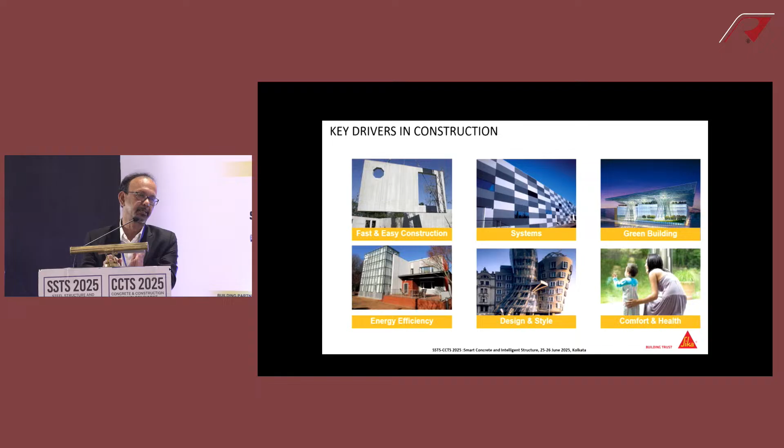Anyone heard of the Chungthang hydroelectric project in Sikkim? There was a tunnel lining to be done, and it was inaccessible for concrete truck mixers. What happened finally was that concrete could be pumped across 2 kilometers on a decline. Concrete to be pumped on a decline is more challenging than incline. And we have so many good examples across India. So I'll be talking about all of that.

And dispersant, so the topic is dispersant polymers. Now what is so important about dispersant polymers? It's very easy to have a polymer. We call them admixture.

And wherever you go today, contractors, ready mix companies, pardon me, always say, okay, are you L1? Total cost optimization is never seen. When you talk about total cost optimization, it's the speed at which you can pump concrete. It's the technology you use, whether you use it for precast. India now is going a big way in precast.

In fact, everything in the bullet train was almost precast. Almost 300 kilometers have been finished. Now the next 200 kilometers, 204 kilometers, will be built in Maharashtra.

Then we are talking about complexity of structures. If you look at structures like the Parliament Building, the new annex, all these are about the complexity of design, and why you can put your concrete without blowholes, fair finish concrete. I will show you some examples where high-rise buildings have gone up with just fair finish and no plastering. You can almost see your face on the wall, it's so shiny. And it is possible to do it if you just adopt certain technologies and certain practices.

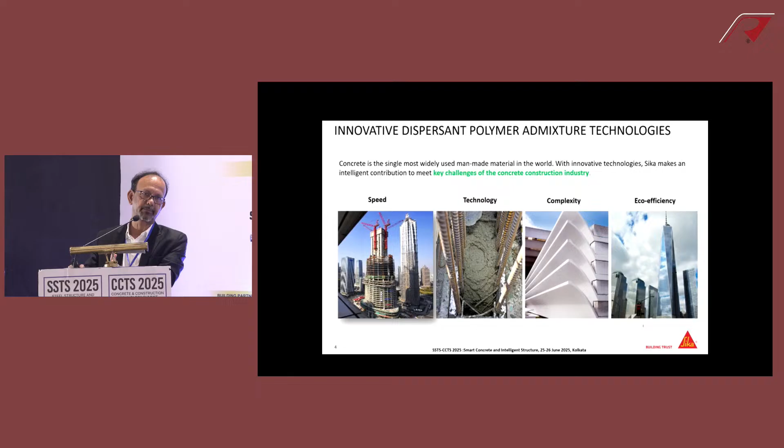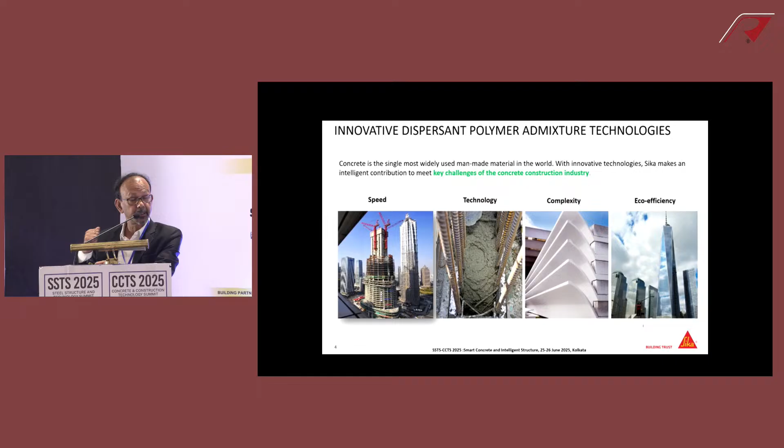Then eco-efficiency. Most developers in the market would love to have green rating. Big houses like ITC, for example, Nestle, whenever they do structures, they always love this green rating. Green rating is a function of concrete and other elements like lighting, LED, etc. It's also about how you do rainwater harvesting. Concrete is one of the most important elements, and we will explain a little bit about that.

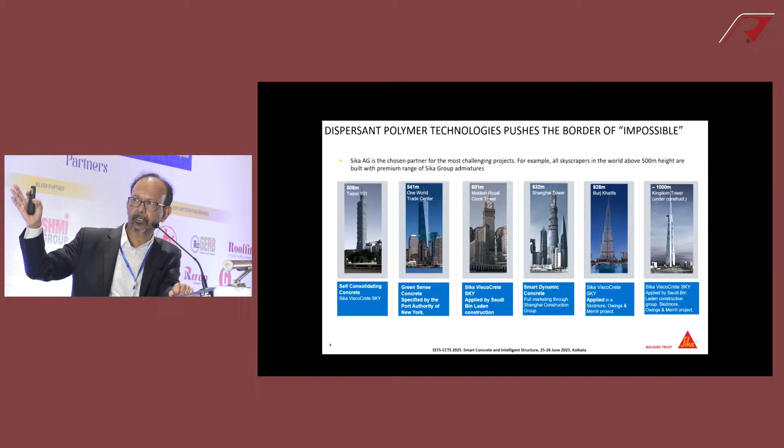This is just to give you an idea of how dispersant polymer technology, as you go from height to height, across from Taipei right up to Kingdom Tower, which is 1 kilometer tall.

It's not that there were special concrete technologies only from the Western world. Some of the projects I can tell you were also handled by people from our own country, in terms of the concrete technologists, quality control experts, etc.

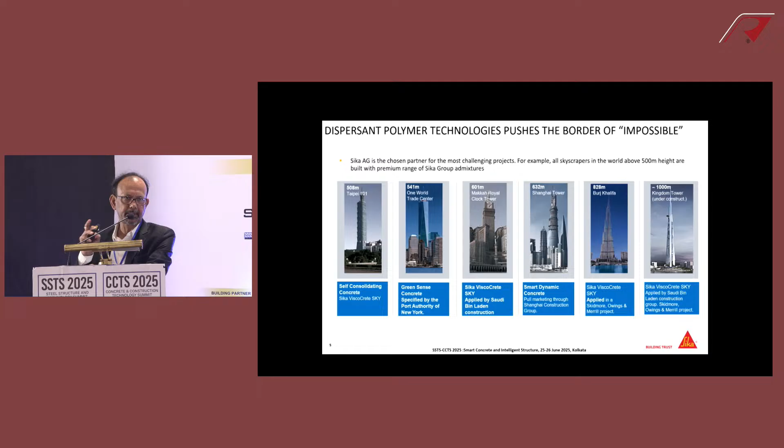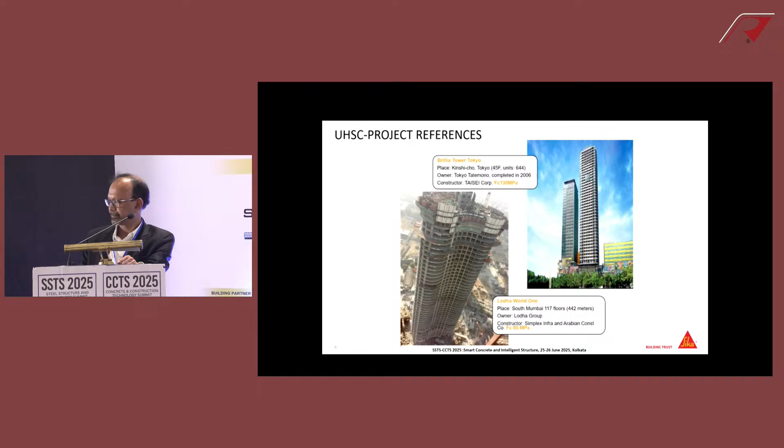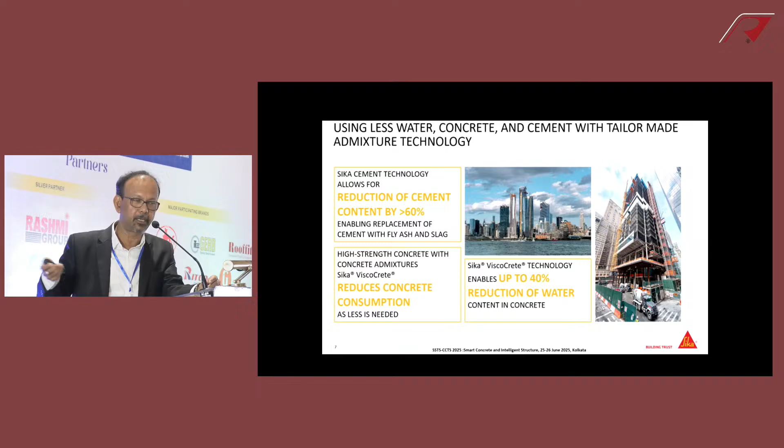So less water, concrete and cement with tailor-made admixture technology sums up what it is. It reduces concrete consumption because you have slender columns, especially in the example of ultra-high strength concrete for a bridge, where the section thickness of 150 mm came down by almost 50%.

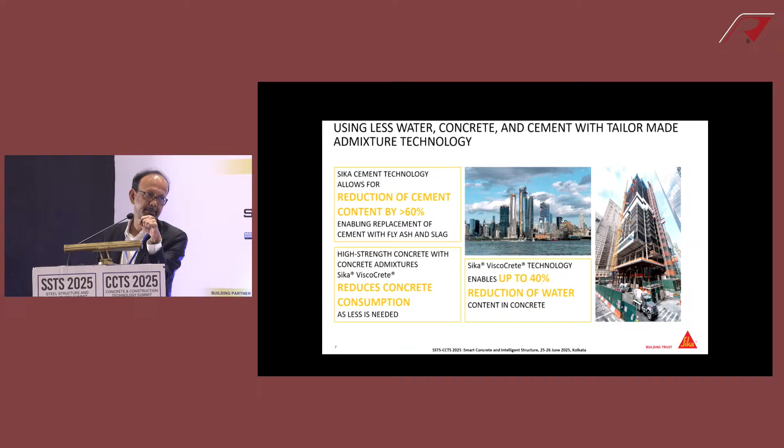So look at the weight transfer. You did not have too many piles resting, only the span even for the foundation was around 50 meters. So less concrete again, eco-efficiency.

So just to give you an example, everything comes packaged in the molecule, which is about the chain length, the side chain, electrical charges, etc. I think this is all known very well because admixtures are now almost 40 to 50 years old in the country.

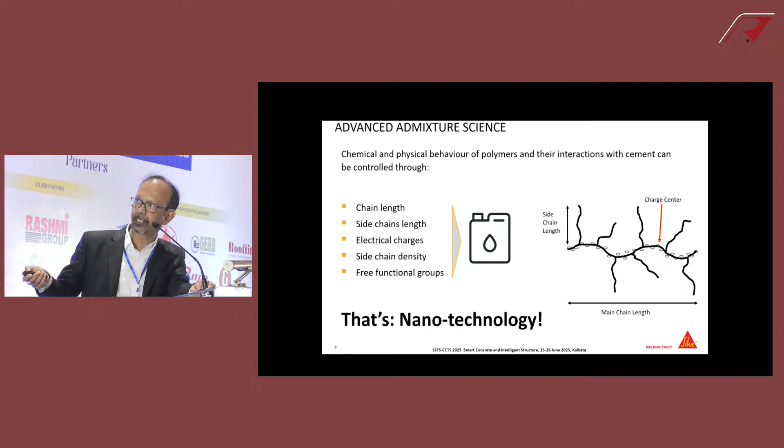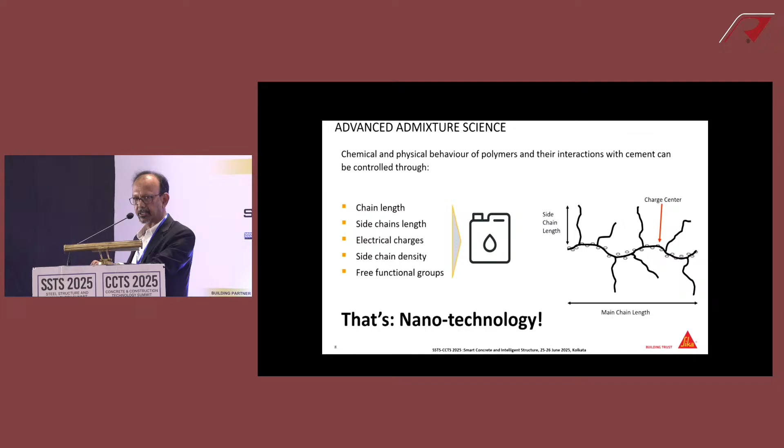This is where the molecule is like a fish bone. You have a central bone, and you have side bones. Depending upon the design the manufacturer does, with the charge centers and the spacing, this is what creates the dispersion effect.

But it's not only about dispersion. It's also about controlling the mix quality, the ease at which the concrete can be mixed, less vibration. You can have a concrete where you vibrate for 15 seconds and it spreads. Then another concrete needs only 5 seconds, it spreads easily, no blowholes. When you remove the formwork, you get fair face concrete. And then there is another concrete where you don't have to vibrate at all.

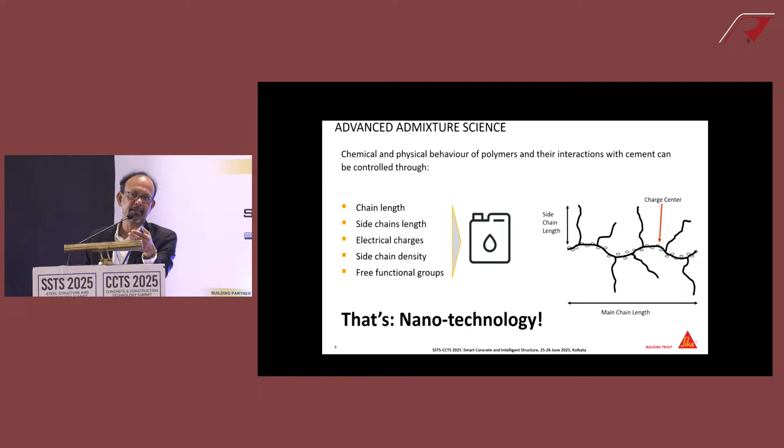Less labor, less energy. Vibration also requires energy, it requires fuel, it requires people to vibrate. So look at the optimization, because skilled labor in the civil engineering or construction industry, what it used to be 20, 25 or even 30 years back, you don't have it today. Construction experts are facing a big challenge on the ground.

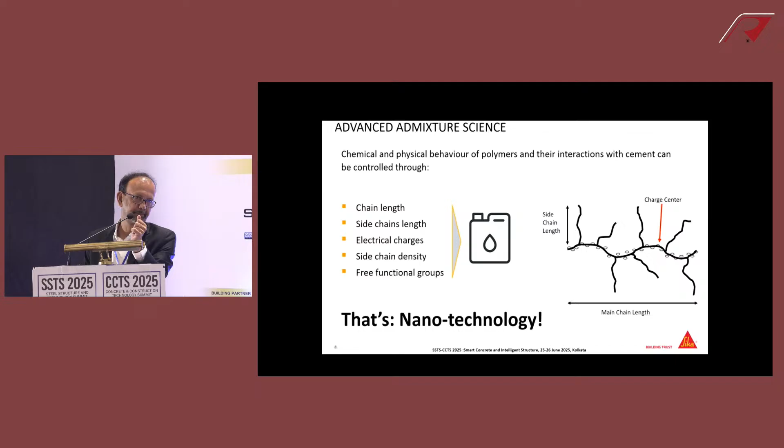So just to give you an idea of how the mechanism goes: the calcium ions of the cement, this is cement, and then you have this PCE technology. This is the long chain, and these are the innumerable side chains. The design, of course, is based on the manufacturer, and this is what you get.

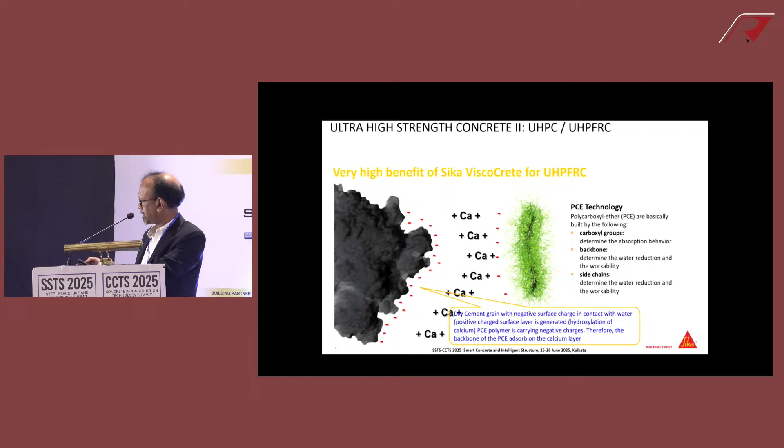And you know, like charges, when they are coating the cement particles, repel each other, and that is how you may have more available water for workability.

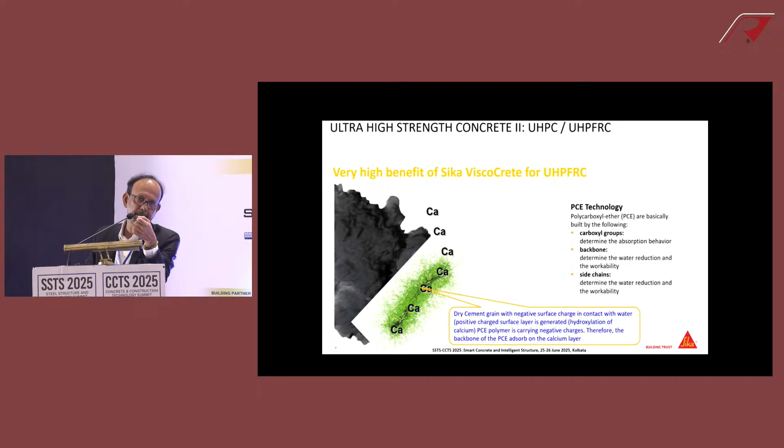This is very basic. Now depending upon this, the extension in ultra-high strength concrete is where the water cement ratio is 0.16 to 0.18.

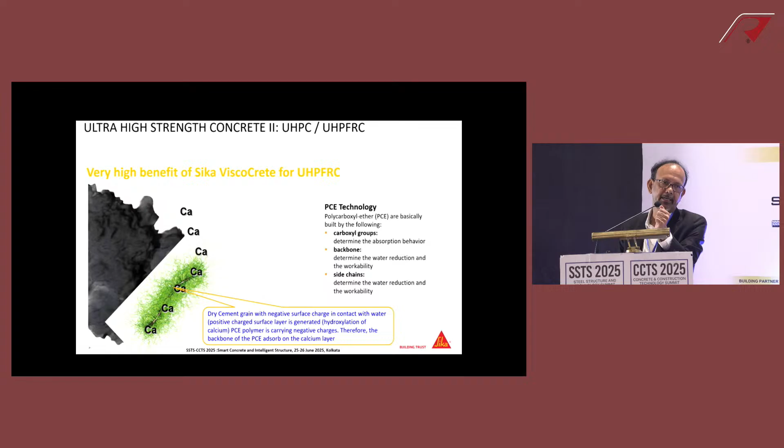And you can still have good workability. You can also have good workability at 0.4. You can also have good workability if you add extra water at 0.5, but your durability factor is going to be zero. You will have corrosion problems, carbonation attack, chloride attack. So all of this is a function of this balance.

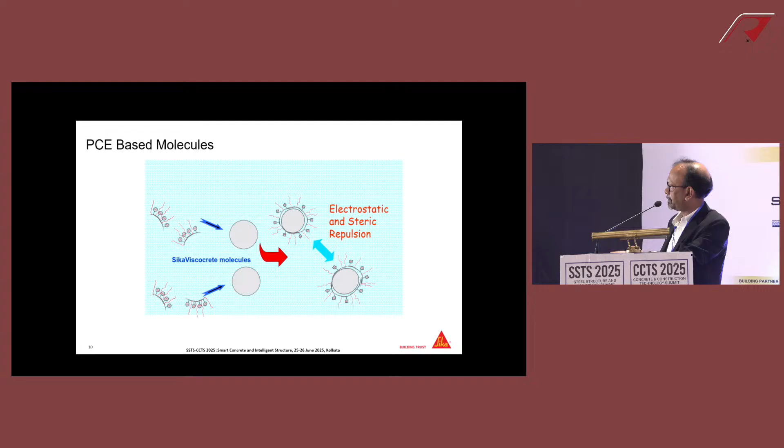So if you see, these are the molecules. This is the cement particle, and basically coating around the cement particles, like charges repel each other, and that's where the available water, which is formed in the form of flocks, becomes available.

This is just to give you an idea, because when you tailor the admixture, you take into account the water reduction capability, the strength enhancing capability, the viscosity, which is the ease at which you can mix, and the plasticity retention.

Today, when we go to ready-mix companies' requirements, especially in crowded cities like Bangalore, you require 4 to 6 hours of slump retention without loss of the quality of concrete, and you do not add water in between during the transit time. So this is how the design happens.

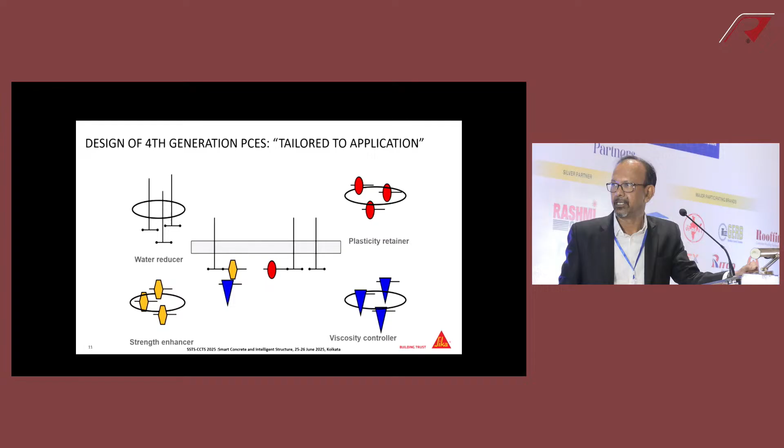Long chain, short chain. So just to give you another picture. High performance is basically about the low water-binder ratio. And for that, we need specially tailored, tailor-made additives or admixtures.

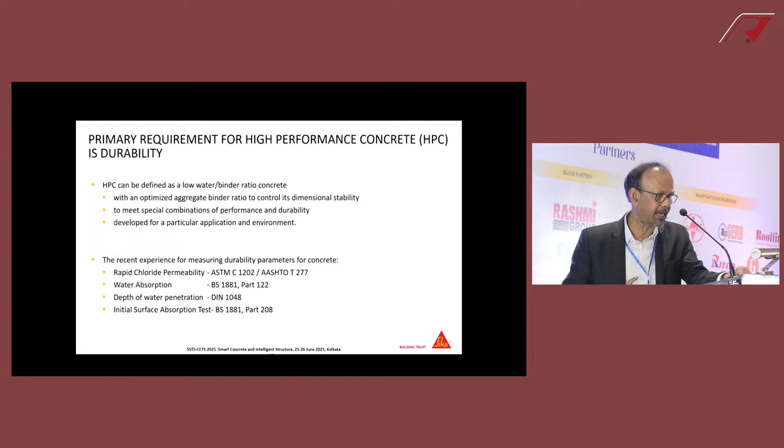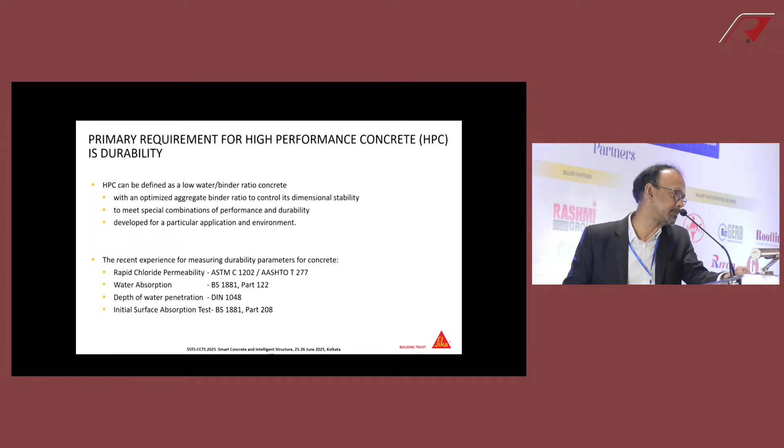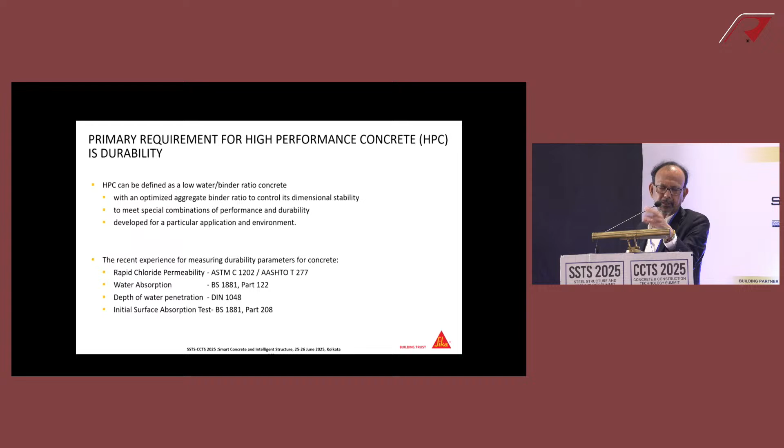I mentioned about durability. So you can see RCPT, water absorption depth, and initial surface absorption - 4 main parameters, considering whether exposure is extreme or severe, how close it is to saline or sulfate conditions. Chloride attack is obviously faster than sulfate attack.

So when we talk about low carbon SCC, low carbon self-consolidating concrete - self-consolidating concrete is basically all about EFNARC guidelines. You also have it in IS 10262, but they have just copy-pasted from the EFNARC guidelines in terms of flowability, passing ability, and segregation resistance.

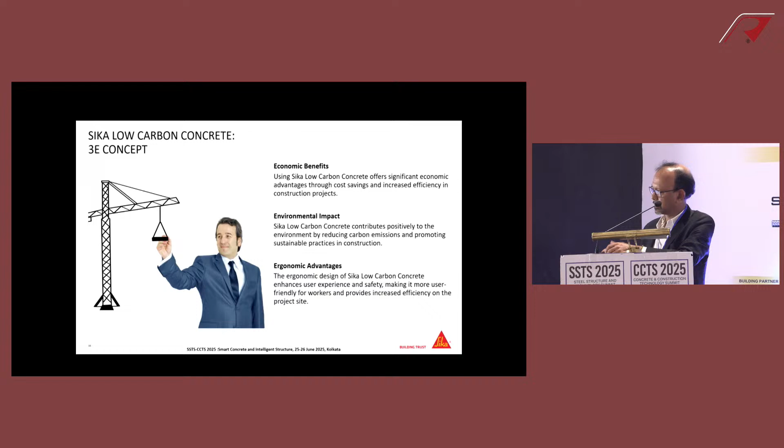So, optimizing material usage - that means today I can design a 30 MPa concrete as SCC. It was not possible before. Before, if I had to design 30 MPa concrete, I used to need 600 kg per cubic meter of fines, which is less than 150 micron.

Today, I can do it with 450 - huge cost saving, because bulk of it is supplementary materials and cement. And this will actually lead to longer lifespan.

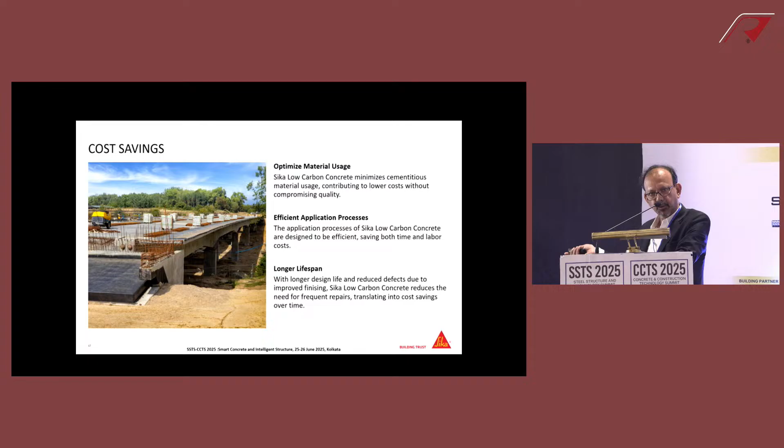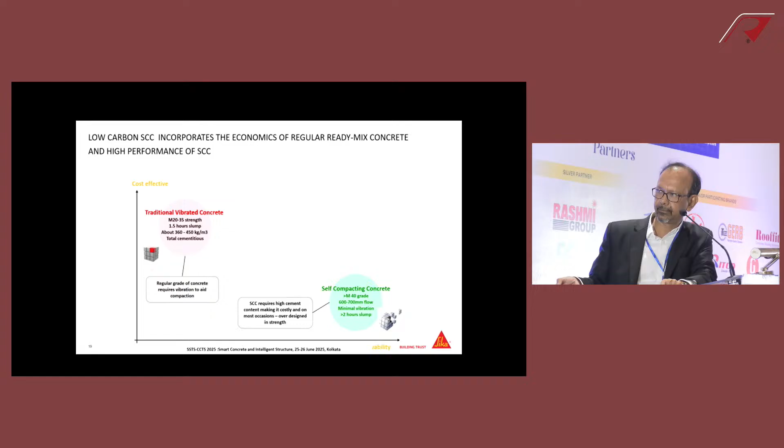So this is just to give you an idea about cost effectiveness versus flowability. So traditional vibratable concrete, self-compacting concrete, and then this is where low carbon SCC is. And you can design 25, 30, 35, 40 MPa, especially for massive industrial warehouses also.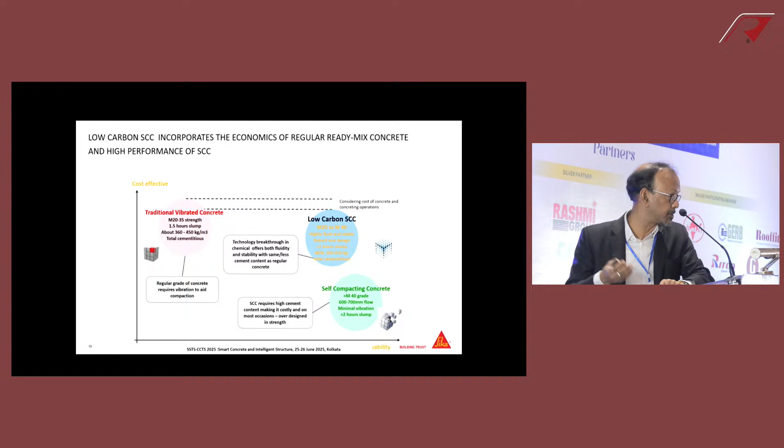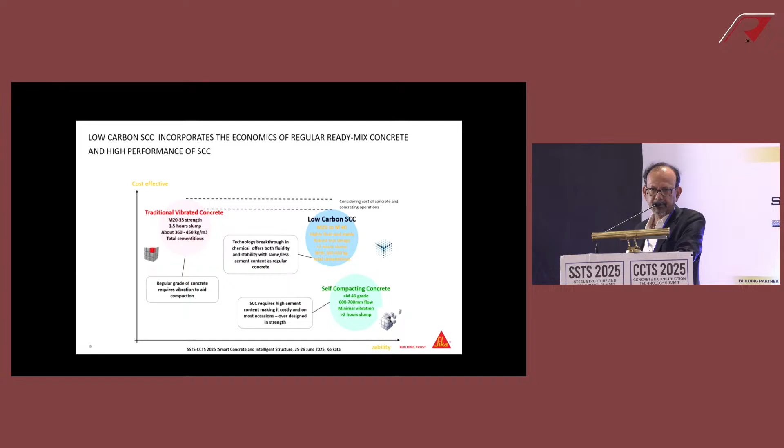The flooring can be done with PP, polypropylene fibers, to improve the flexure as well as to improve crack resistance, because cracking is also another phenomenon.

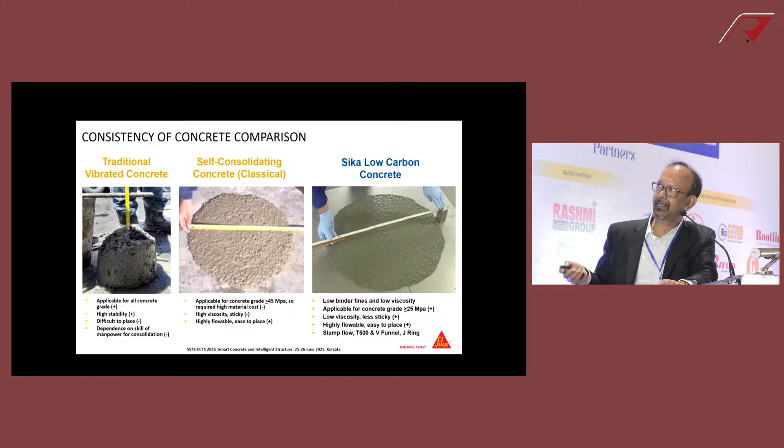So just to picture your traditional concrete, classical SCC, and low carbon SCC - you can look at the finish.

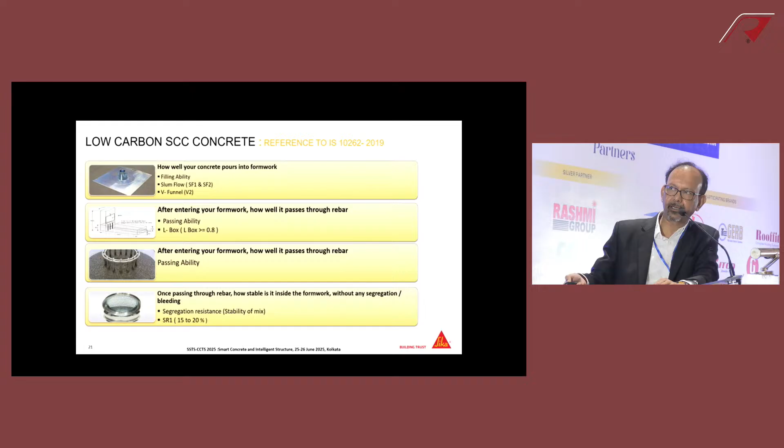And these are the various tests. Now today, if you look at it, people say I will deliver SCC to you, or I will provide SCC to you, but half of them don't do the passing ability test, J-ring, which is very important, because J-ring determines whether your concrete can flow through congested reinforcement.

Congested reinforcement, especially when you design 60 to 80 MPa for columns - thin columns and beams - you need the concrete to flow. It's not only determined by flow, but by passing through a space of 37 millimeters, or even sometimes less. So this is why the equipment has been designed.

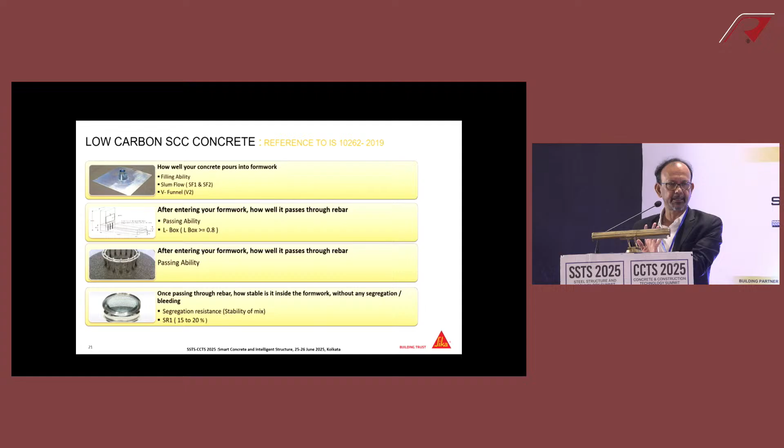This is just to give you an idea of the qualifying criteria for various parameters - SF1, SF2, VF, whatever you are looking for.

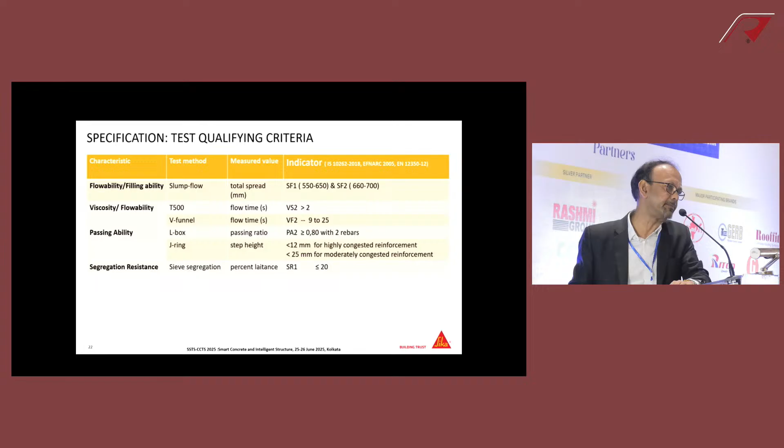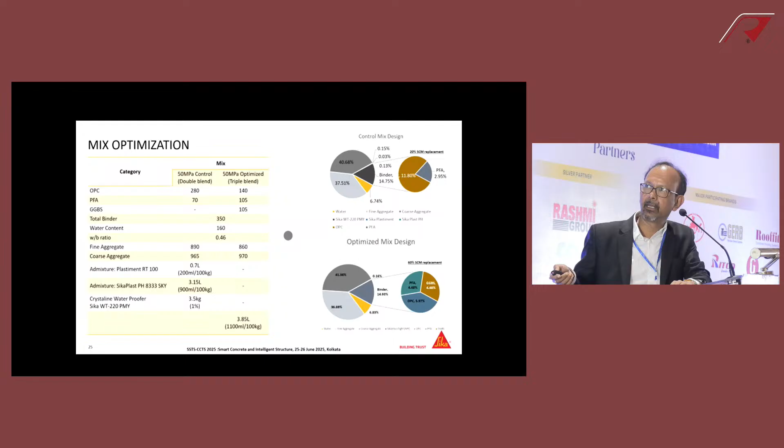So to give you an idea about mix optimization - you see this 50 MPa double blend, which is basically with only cement and another supplementary material. But you convert this into a triple blend, and I will show you the compressive strength does not change.

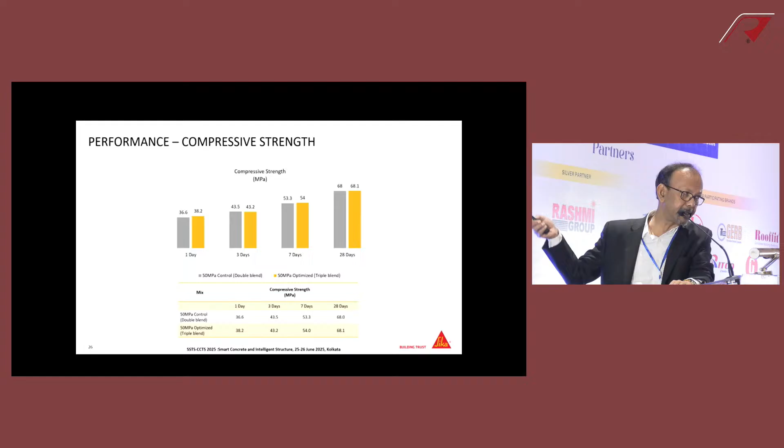Even early strength is slightly less, but it picks up, and that is the beauty. If you take 90 days, 180 days, it will be higher. And then you see the durability factor.

And you have a 44% CO2 savings. This is huge, especially for developers or anyone interested in LEED rating or green building.

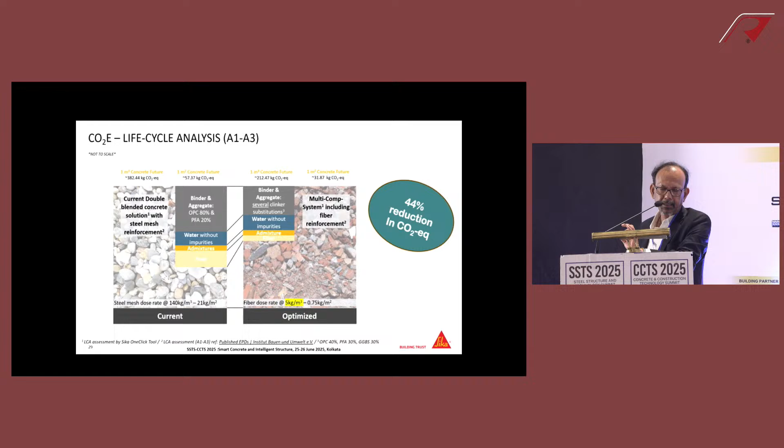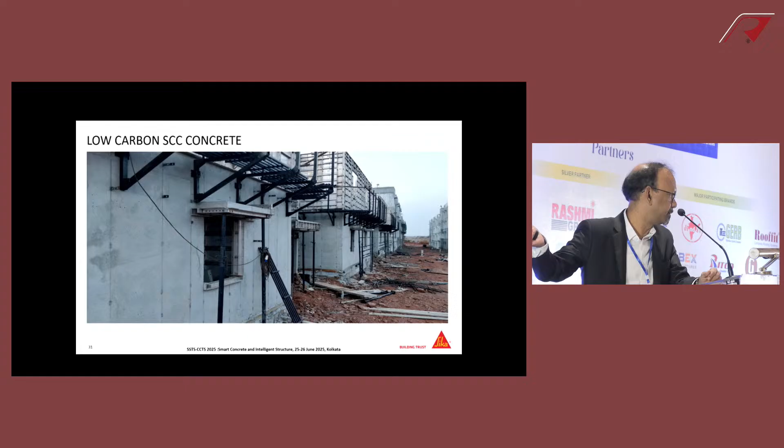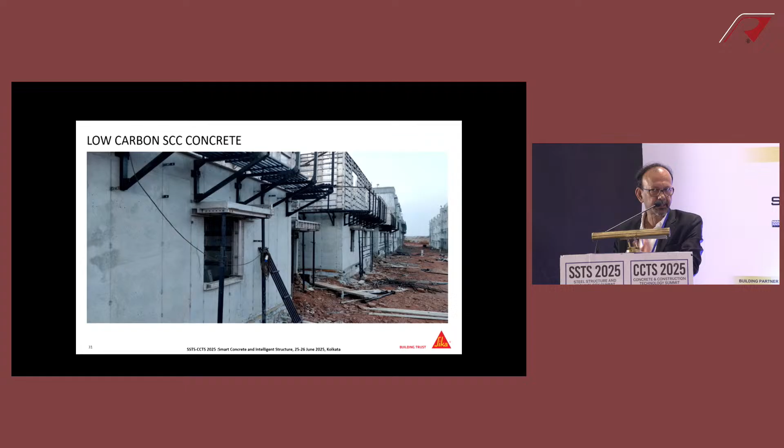So let me give you some examples. This surprisingly is a low cost slum development, because we always think such concrete can only be used in complex structures. Bangalore slum rehab - they went for 2 massive housing projects, and they used this with formwork because they did not have high capital expenditure, so they used only 2 or 3 sets of formwork to roll it out for the entire area. So that is also cost saving, energy saving.

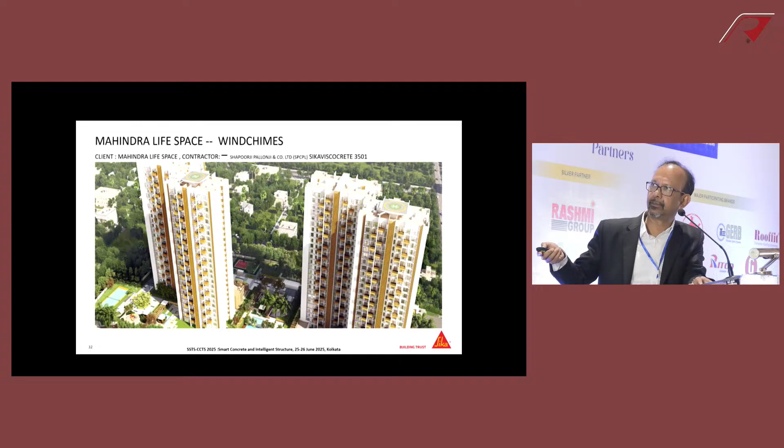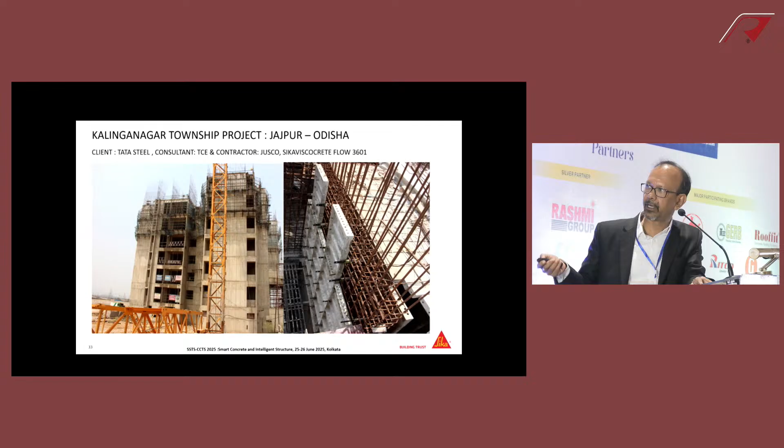Again, on the high end, you have Mahindra Lifespace, also used with low carbon SCC. Then at Orissa, again, these are 2 pictures, one traditional and one with SCC. Then this is in Bangalore. And people from Bangalore will also be very impressed.

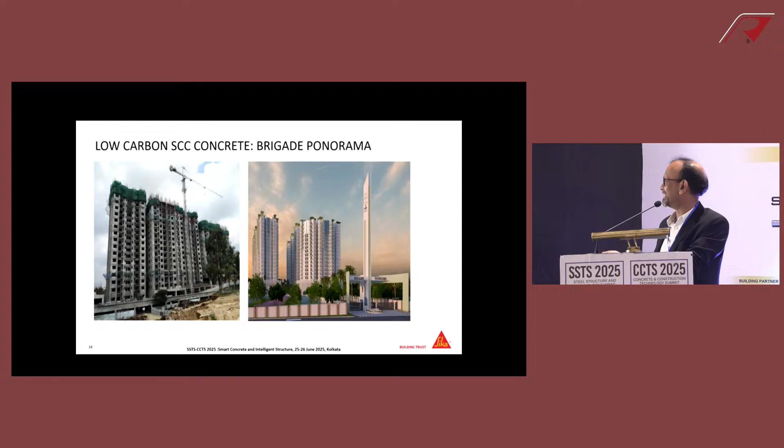So the other advantage was pump pressure. Now if you've got a very stiff mix, which cannot be pumped but looks very flowable, when you lift your slump cone, it will creep on the slump board. Now for that you require a high pump pressure. So if you're pumping 50 meters, 100 meters, you will require 200 or 250 bar.

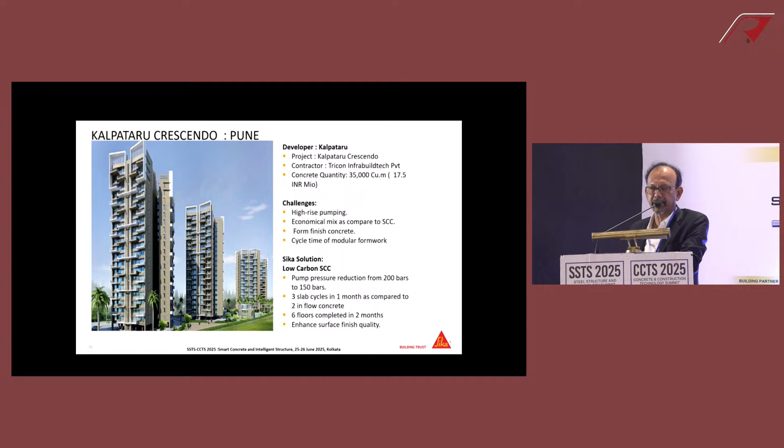I told you, of course, I cannot see my face on this, but look at the fair face.

It prevents repair, which is again costly and time-consuming, and it also gives you very efficient service for the subsequent work when people occupy it, paint it, or do some putty work. Less consumption.

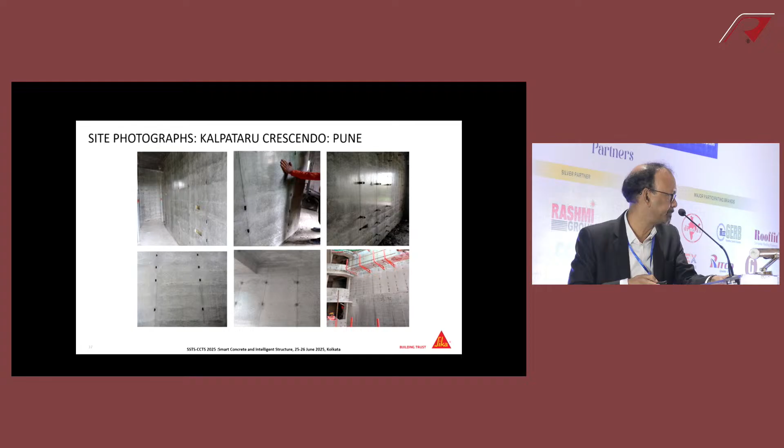I'll give you a simple example for people who may not follow it. You take a pot, put concrete in it. You take a spindle, like you'd do with dal, and try to rotate it. The more easily you rotate it, the less stress it is. Very simple, no complication. Actually, I thought civil engineering was very easy.

Pothikda will not agree with me, of course. But this is the actual definition if you really want to understand concrete very easily, because we like to complicate it. People do research with so many measurements, but I have a very simple way.

You know dal, you know that you use the spindle to make it uniform. You use that same idea for concrete. If it's easy, you don't break your fingers - that's the best mix you can have, as long as it doesn't segregate and there's no bleeding. Those must be taken into account, and it should flow very easily.

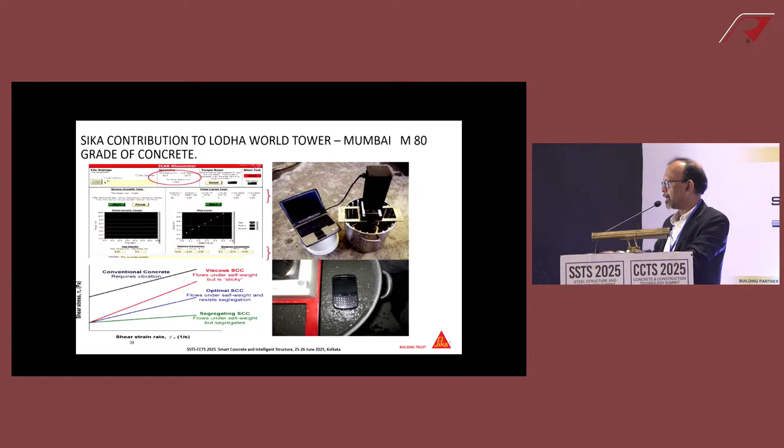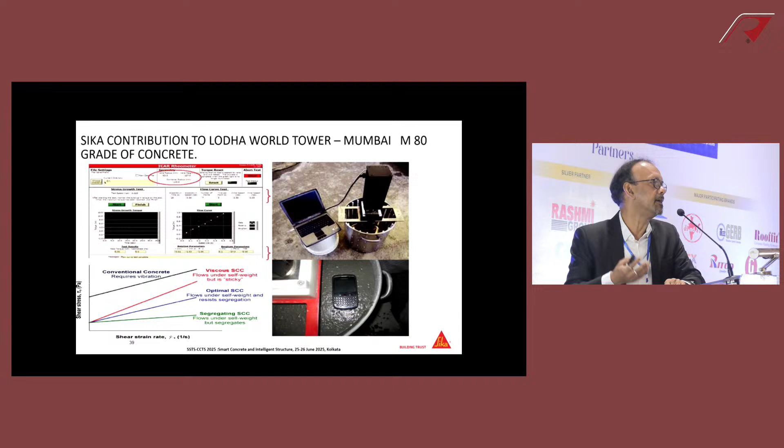So this is a measurement done for 80 MPa concrete, pumped about 180 meters at a very low pump operating pressure. People will be surprised that 160 bar pressure can be used to pump that, but it is possible.

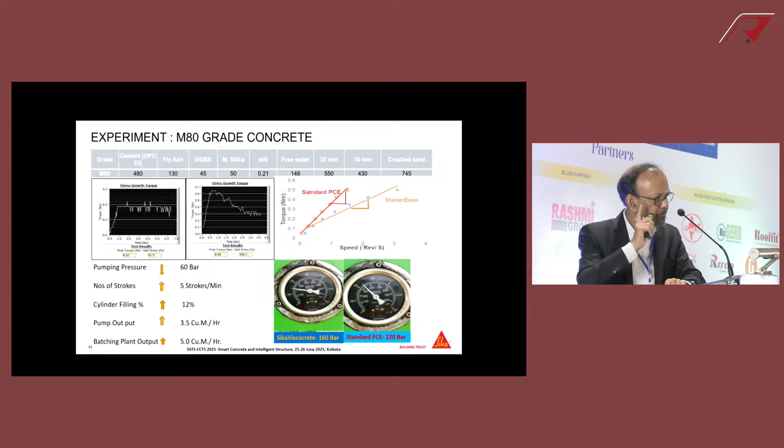Even with difficult aggregates - today natural aggregates are very difficult to get. With manufactured aggregates, or manufactured sand as we call it, or crushed sand, you obviously have to remove the deleterious impurities, but even with that, you can achieve it.

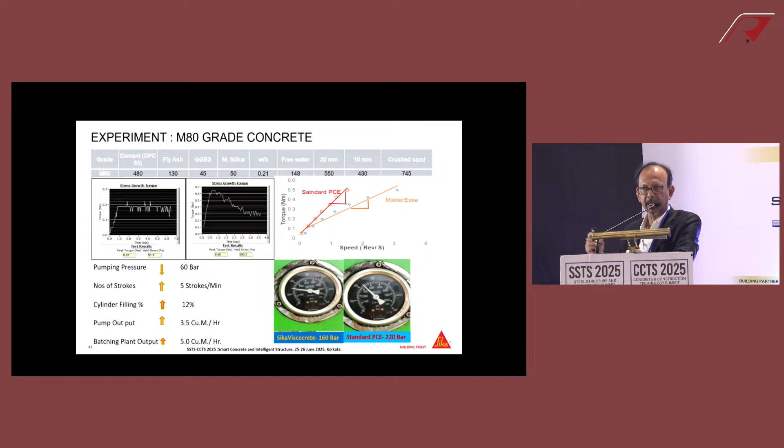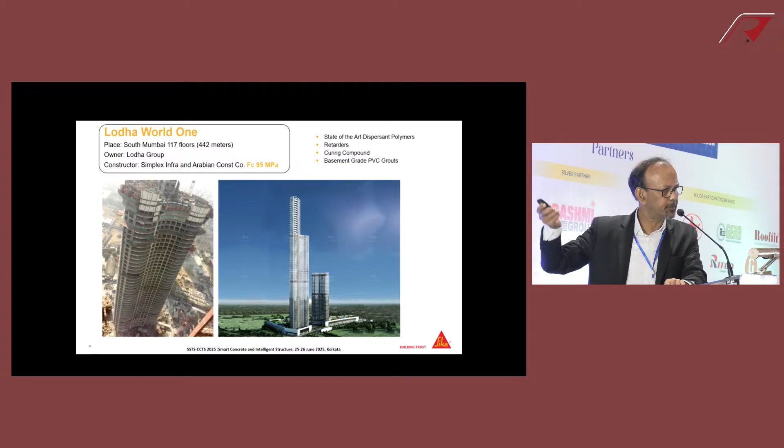So you see, this is what was used even up to 95. This is Lodha World One.

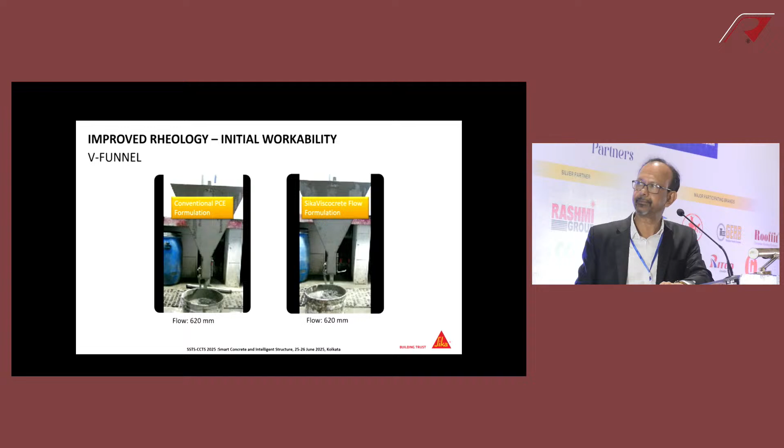Just to give you an idea about conventional PCE versus this, the same flow, but look at the time taken to fill it up. So you can see the time difference - this is the rate of flow, or rate of ease of flow.

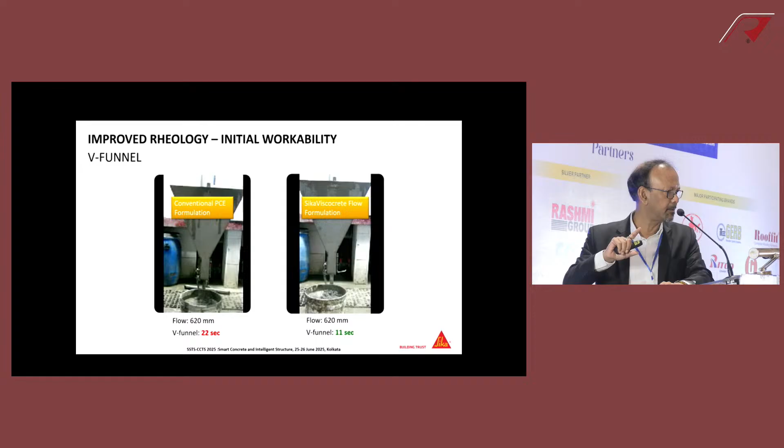That translates into the flow through the concrete pipe, aided by the pump, at whichever level you want to take it.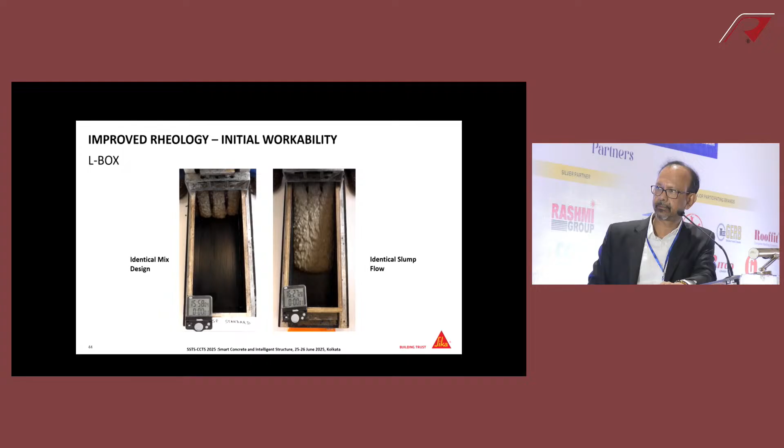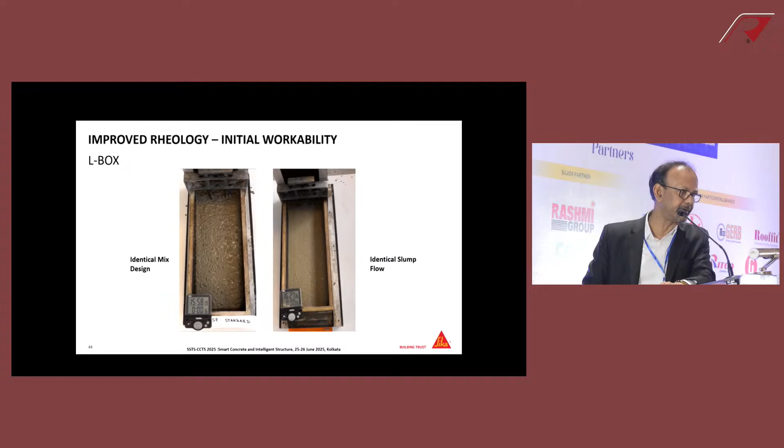L-box, also a very important test. You see the flow - no segregation, no bleeding. And on the left side, creeping, till it comes to a respectable level. And then you measure L1 by L2.

I spoke to you about Burj Khalifa. This is very passionate for me because I was very lucky to be involved in this project around 2004, 2005 - an 824 meter tall structure. You see this foundation? This foundation was about 20,000 cubic meters, with deep piles around 2.5 meters wide and 50 to 60 meters deep.

SCC, no segregation, single pour. But look at the number of bends done here for the trial testing, to ensure that it pumps. The first stage was up to 400, because people said that after 400 we'd need another pump. But the mix was so good, it was called soupcrete.

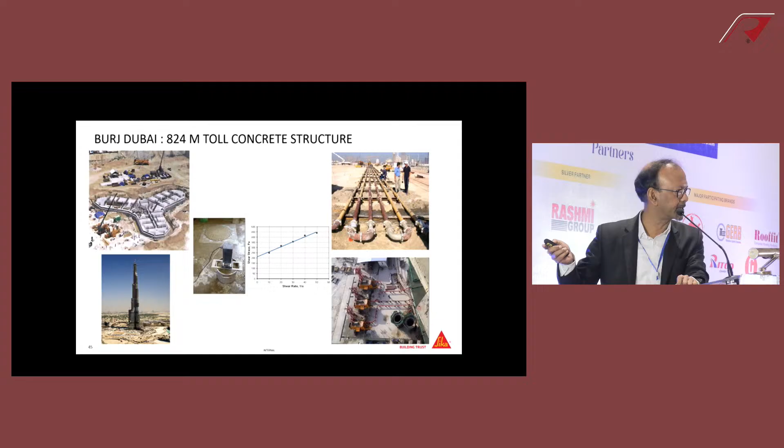And with this soupcrete, it was possible to pump even up to 628 meters. Of course, the rheometer was used here as well, just to check what stress is required for the required strain rate.

One more important thing - this is an IIT building in Tirupati. I mention this because we're all talking about the finish of concrete, which is also important. Getting the concrete good is not all - it has to be placed within the formwork so that when you release the formwork, it looks very good.

So that you don't have any blemish, any bug holes, or any porosity, because corrosion and carbonation attack will bring down the pH level of concrete from 13.5 or 13 to 9.5, where the first stages of corrosion you'll notice as reddish or brownish spots.

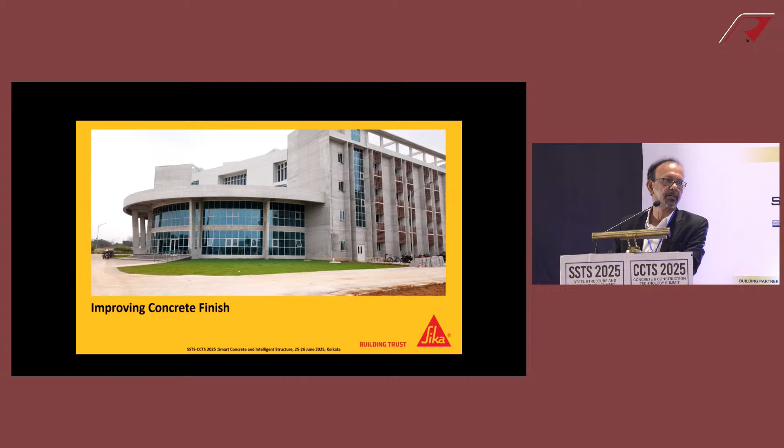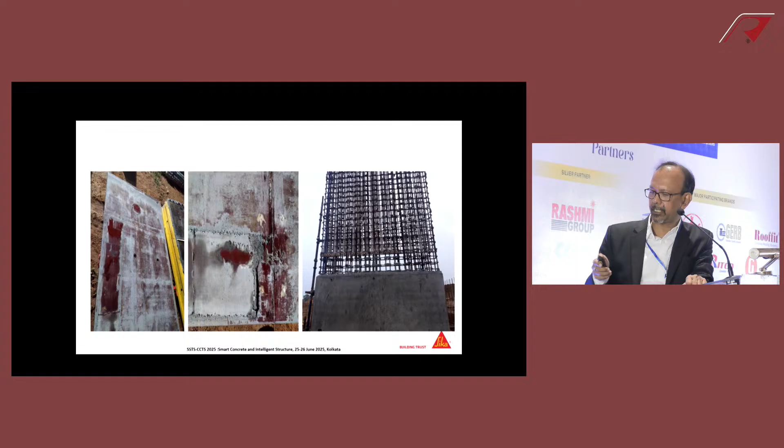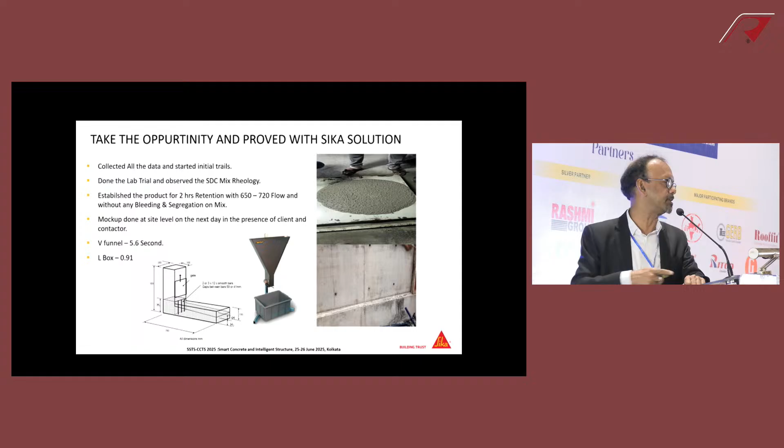So look at the left, and then see the next picture with low carbon SCC, using the equipment at site and not running away from it because it's seen as a hassle. Such tests take a little time, 2 or 3 minutes, but it's worthwhile in the long-term total cost optimization.

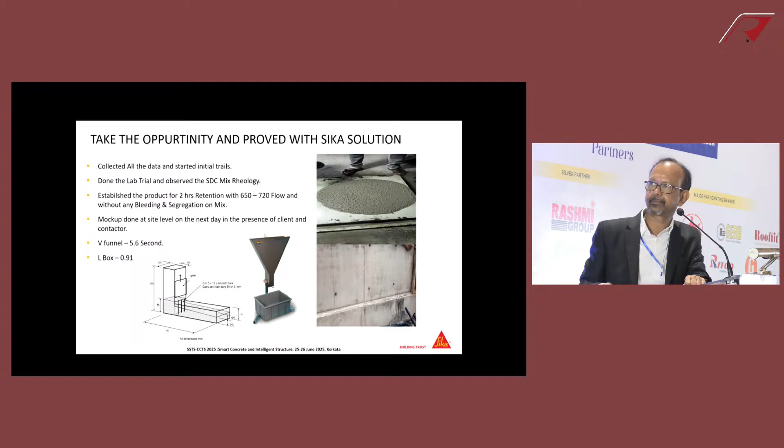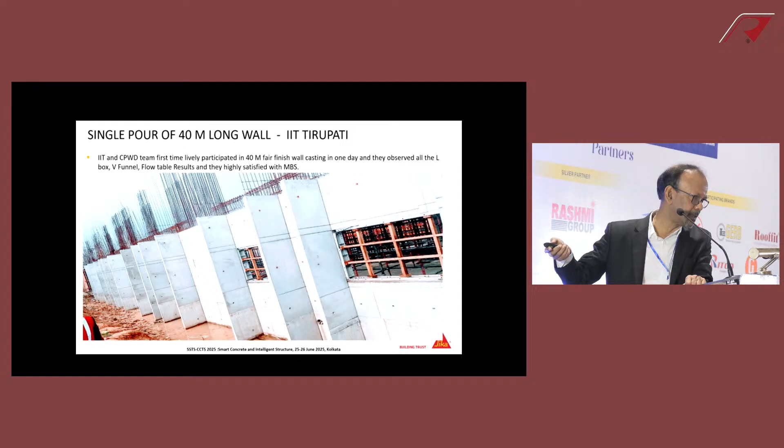So you look at the finish - fair face concrete, and look at this. This is not a doctored picture. This is actually real life, and it's possible to have concrete without any blemish. It just takes a little bit of extra care.

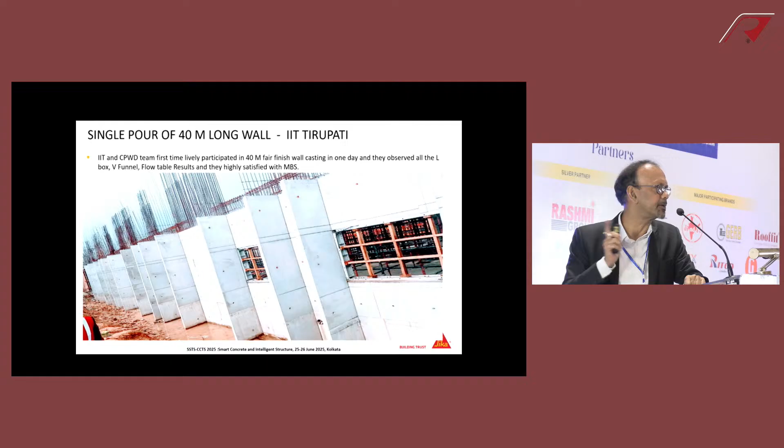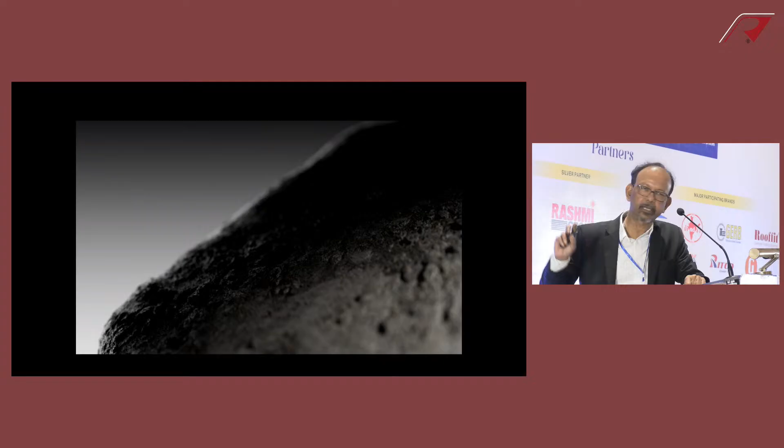Just this last one to give you an idea of how these dispersant polymers work. This is the cement particle, and you will see it coated with the different types of polymers.

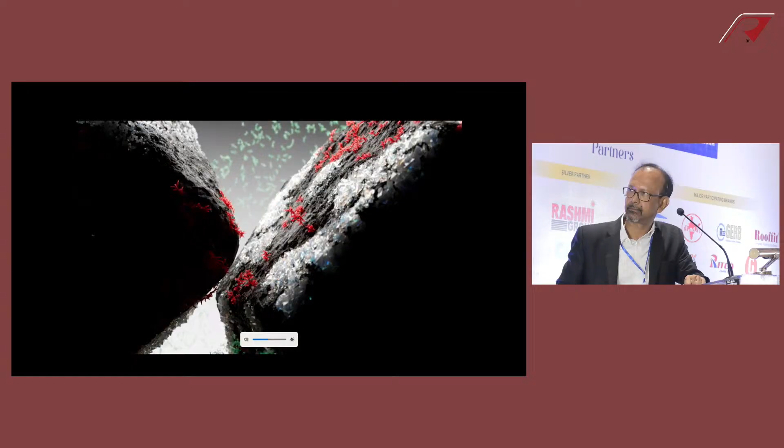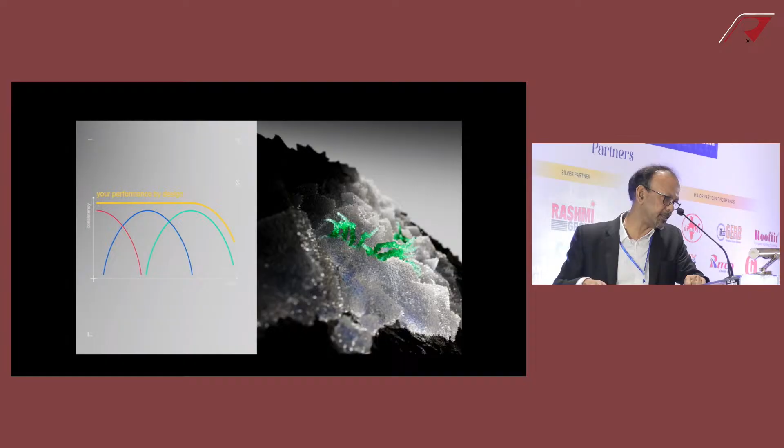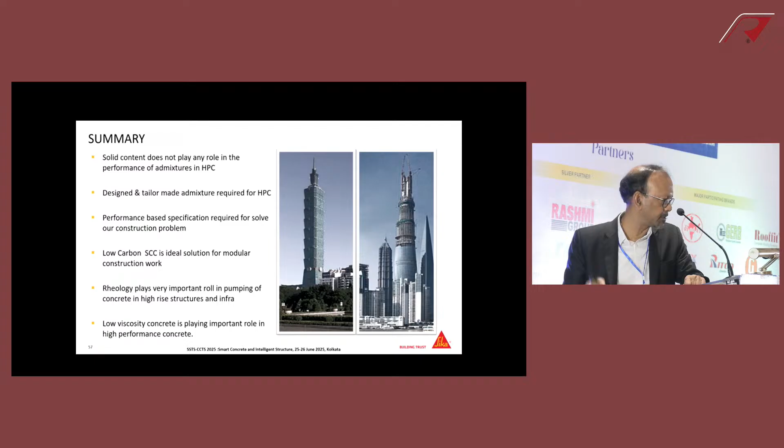This is what happens in reality within the concrete, because these admixtures are really invaluable to the quality of concrete. Many people think that the thicker the admixture, the better it is, but it has got nothing to do with it. It's all about the chemistry, the long chain and the short chain, and what type of polycarboxylate ether is used. I spoke less about chemistry because I think you will understand performance better than chemistry. It is also possible to design different tailor-made admixtures, whether for North India, South India, East India, Northeast India, Chhattisgarh or Bihar, based on the local aggregate.

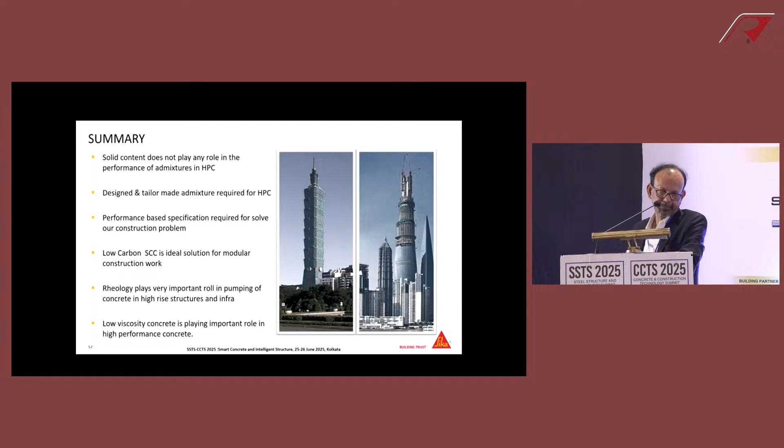Thank you very much for your attention. Thank you.